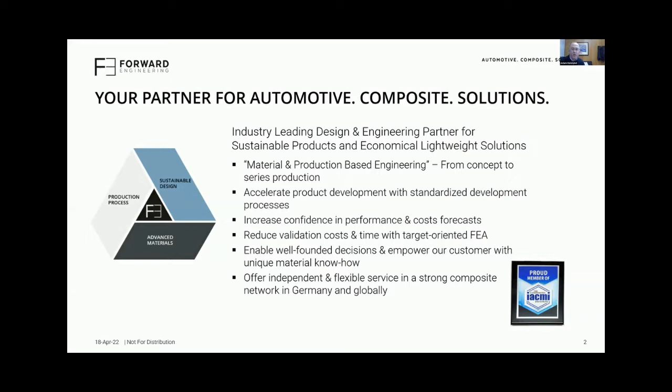Real quick, Forward Engineering, for those that don't know who we are, I'm Adam Halsband, Managing Director of Forward Engineering North America, based here in Royal Oak, Michigan. My colleagues are based at the headquarters in Munich, Germany, and in Nagoya, Japan, at Forward Engineering Japan. We are an engineering services company. We help to accelerate the development of composite-intensive mixed material solutions, leveraging our material and production-based engineering technology. So anybody interested in learning more about how we're doing these things, please let me know. But without further ado, let's jump into the topic at hand.

So battery enclosures. Battery enclosures are the most complex subsystem within the vehicle today. Now, we could argue that point, but from our experience and the projects and programs we're fortunate to be working on, the battery enclosures as we move into an electrified age are one of, if not the most complex subsystems within the battery electric vehicle. From structural crash, crush, EMC, moisture, liquid intrusion, thermal management, there's a very broad range of requirements, and not the least of which is thermal runaway.

When we think about requirements for these high voltage battery enclosures, it really is a mix of regulatory requirements and OEM technical requirements. So at Forward Engineering, we spend an enormous amount of time on understanding how to translate those global regulatory requirements and the variety or mix of OE requirements into relevant requirements at a subsystem material level. So we're working with folks up and down the value chain to understand how to translate those requirements to material level requirements, system level requirements.

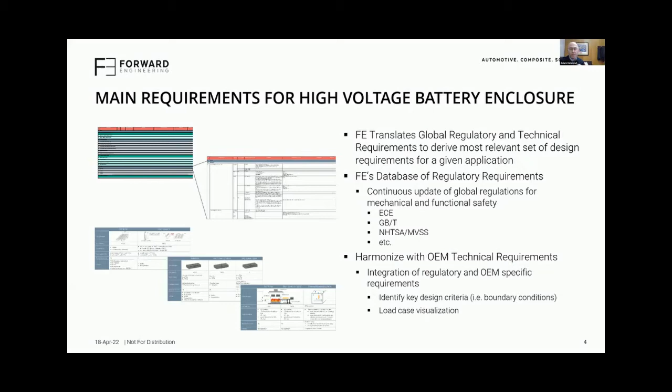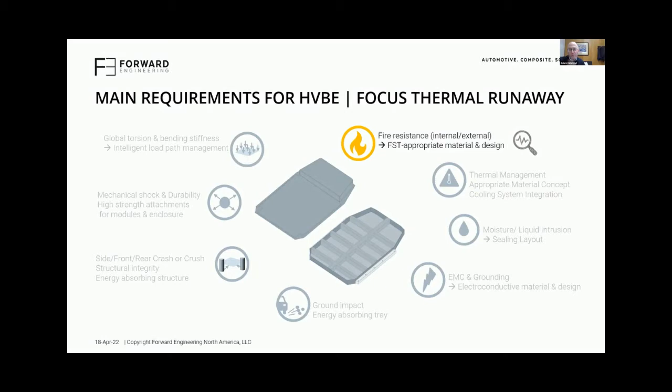For today's Innovations Insights, we're going to focus on thermal runaway of the multitude of different functional requirements and mechanical requirements. And we're fortunate to work with a number of different IACMI members. And I should have shouted out earlier, we're very proud to be an IACMI member, but working with a number of different IACMI members and others on advancing different solution sets for the multitude of functional requirements. But today we're going to focus on thermal runaway.

Historically, and by historically, I mean prior to 2019, 2020, when you would talk to folks about the most stringent regulatory technical requirement driving battery enclosure development material selection, they would point to the bonfire test. So GBT, China standards, European standards, the ECE R100 shown there, have a requirement for external fire on the battery enclosure and the enclosure being able to withstand that event that's defined within those standards.

Throughout 2019, China was developing new standards in response to what they were seeing in the field. Others were watching and observing what's going on with respect to the development of those standards, and that brought on the release of the GB 38031 in 2020 with a new set of requirements, which was safe vehicle egress. So basically, an alarm must be alerted and provide the occupants of the vehicles a minimum of 5 minutes time to exit the vehicle without affecting the occupants.

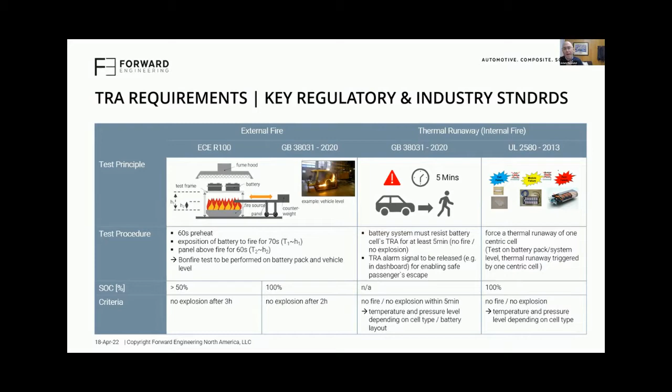With respect to understanding how those regulatory requirements translate to subsystem requirements and material level requirements, what were the standards, what were the requirements? And we were being asked by our clients and partners, how do we translate those system level, pack level, vehicle level requirements down to a material level requirement. And we were fortunate to be working with a particular OEM, and I'll share with you in a moment, who was pushing to understand this.

And we worked with different material suppliers and subsystems suppliers around the globe to understand what tests are out there. And many of you may be familiar with flame testing, the traditional UL94 type testing, and that evolved into torch testing. So amping up the Q factor, the flow factor, how much energy you are putting into these samples, and measuring backside temperature, frontside temperature, and does the sample withstand that?

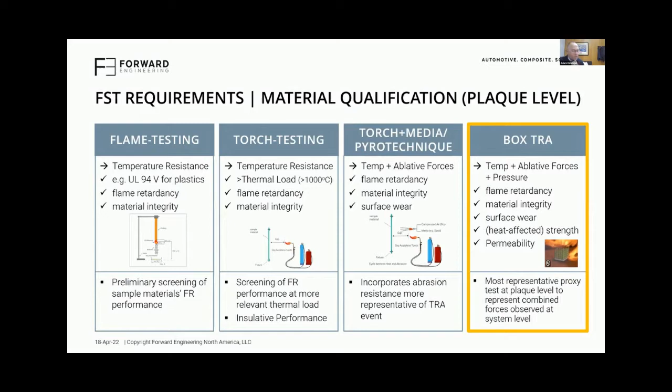The reality is a thermal runaway in a battery enclosure is much more complex than just temperature. And folks had recognized that, and developed a torch and media or a pyrotechnic test. And there's different ways that you can include abrasive media or ablative forces on the samples when you're testing to screen materials for applicability in battery enclosures. The reality is it's not just temperature and ablative forces, it's temperature, pressure, and ablative forces that these materials must endure in order to have a realistic screening of materials for applicability at a vehicle level or at a pack level.

So as I alluded to a moment ago, we were fortunate working with the materials engineering team at Hyundai Kia. They were asking the question, what are representative testing standards? How do we develop or identify the most representative screening methodology at a sample plaque level to represent system level performance? Out of that was born the box thermal runaway test, which has been captured by the Underwriters Laboratory folks. We collaborated with the Underwriters Laboratory folks to capture that test as UL 2596.

So what that test is, and I'm going through rather quickly, I apologize, with the limited time available, want to share as much as we can about this exciting development. That was actually published in January, the UL 2596, but essentially, what we're doing is we're utilizing a 5x5 array of lithium ion cells, 18650 cells, and we're initiating thermal runaway of those cells and imparting that energy on the sample. So when you look at the image on your screen and you see that brown panel, that is the sample under test, typically around 200 by 200 by an appropriate thickness. The nominal thickness is typically around 2 millimeters.

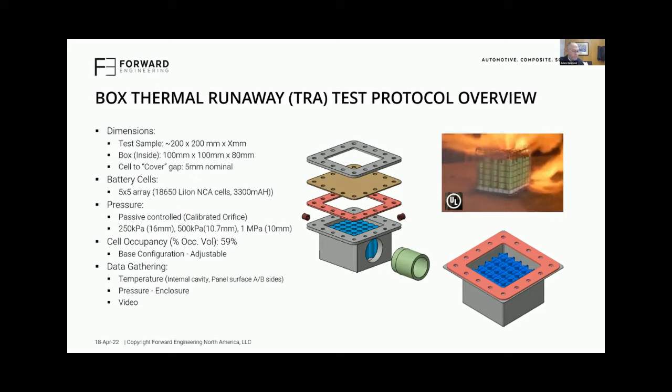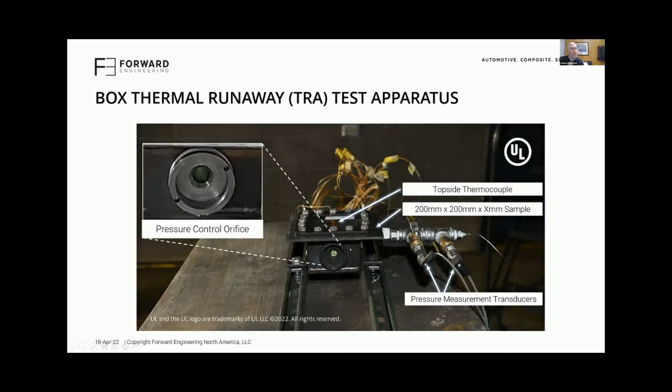In the image to the right there, you can see some wire, which is used to contain those cells or hold those cells as we're dropping them in, and you'll see that in another image. The items over to the right there are the, I think I can use my cursor. So here we have pressure transducers, thermocouple, and we're measuring pressure and temperature inside the enclosure, temperature on top of the sample, and that's some close up there.

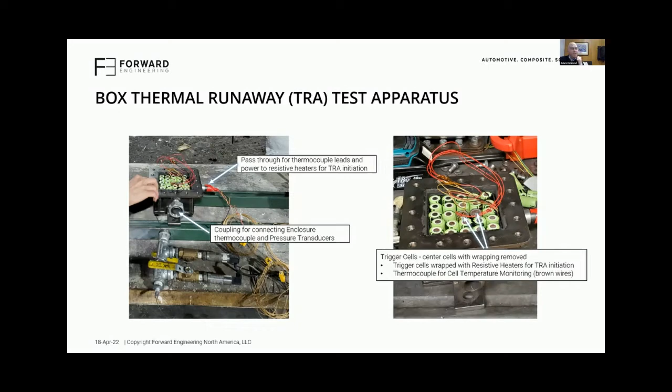And here's the fun stuff. This is not what you want to see. So in the event that the sample does not endure. Now, having said that, not what you want to see, the reality is we want materials to perform good enough. So sometimes when you're running the samples, you're going to push the limits of what those samples can do.

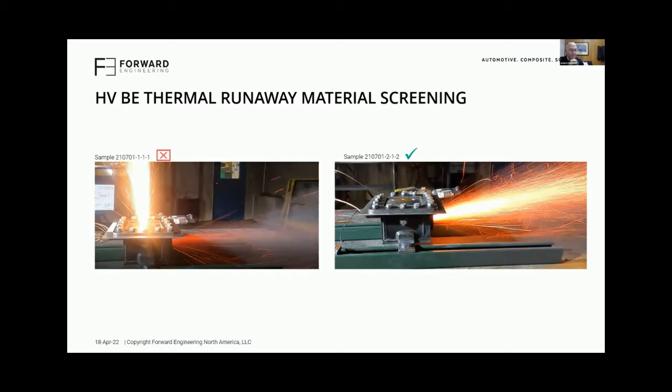And that's what you're seeing here is a sample material which did not withstand the pressure, the energy that was imparted on that sample. On the sample on the right, you can see a material that did withstand that energy imparted upon it. So I'll real quick jump over here and show you what it looks like real time.

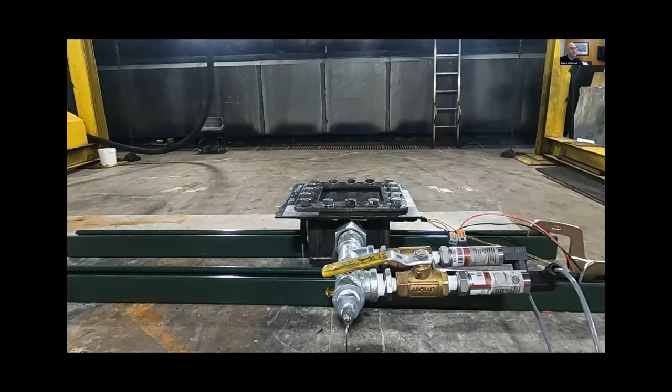That would be an example of a sample panel that yielded, that did not endure the event. Now, let me quickly show you an example of a sample that did endure that event.

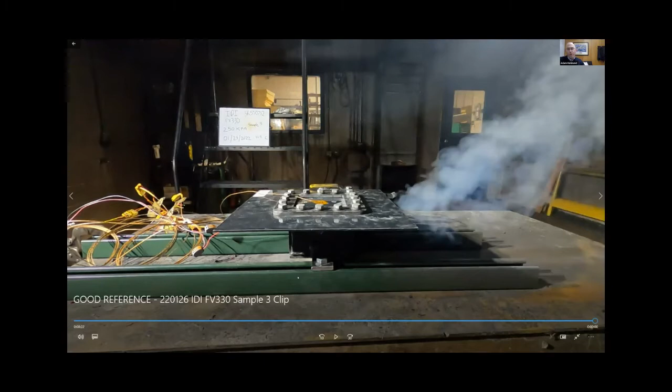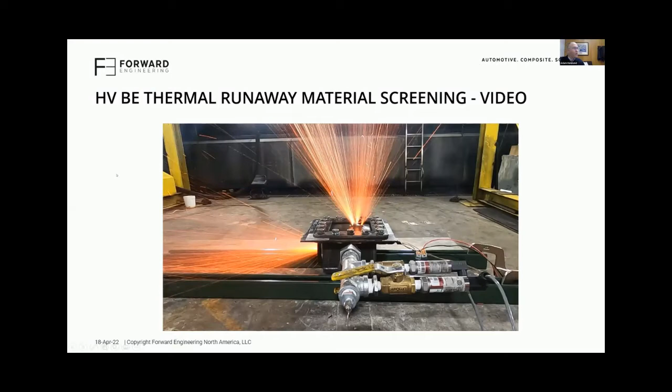And this is, of course, the fun stuff you want to see, where we have a composite sample that has endured the incredible forces imparted upon it by a thermal runaway event, and gives us good confidence that when we scale this up and when we apply this material at a scale level, that it will be able to endure that event.

Again, being sensitive to time, we can see these curves here, and this is the type of data that's generated from the reports. We have temperatures that the samples are being exposed to, 1,000, 1,200 degrees, that nominal pressure that's being imparted on that sample inside that enclosure, a low of nominally 200 kPa up to almost 400 kPa with the nominal 240 kPa. Topside temperature, this green line showing you the temperatures on top of the sample.

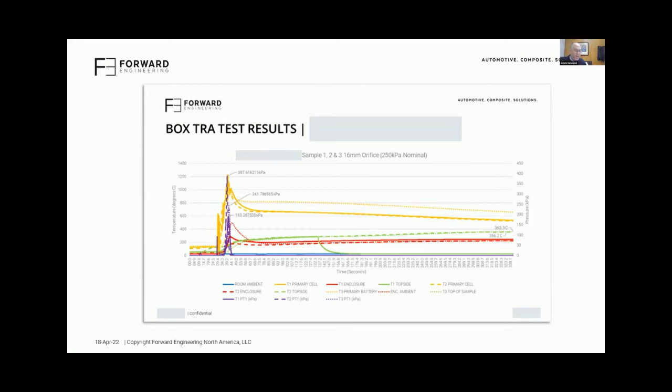And we love to go through in detail and review with the folks that run these tests, the results. It gives us great confidence in what the materials can do at a pack level. So I very quickly went through a really fun topic, and welcome any questions, Dale. I'm sure there will be, whether online or offline.

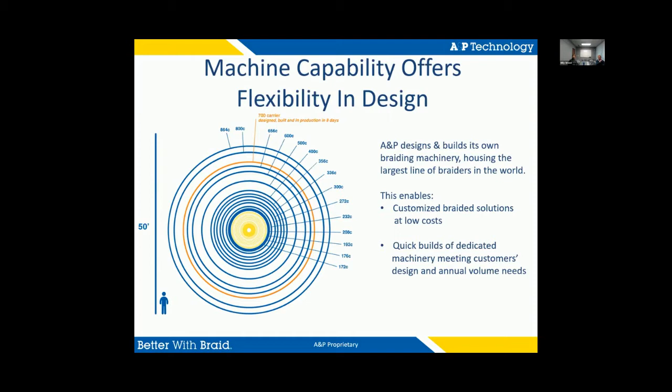Or you can make something using very fine yarns, so a thin cell wall. So think rocket nozzles and such. So having this ability not only to build the world's largest braiders, but lots of braid sizes in between really allows a lot of flexibility for folks like Brandon to work with the customer base or people interested in braided composites in general to really right size and drive cost out of applications.

Three primary product lines, as you can imagine. The first one, the most common one, would be sleevings. But then from there, we can slit the sleeving open, lay it flat to create a fabric, and impart some of those virtues that we talked about with the braid angle optimization into a broad good, which then can be pre-pregged or preformed. So utilizing or marrying the rotational speed of the braider with the take up to create something that's really just kind of a drop and shoot. Again, the focus on optimizing performance while reducing touch time and labor.

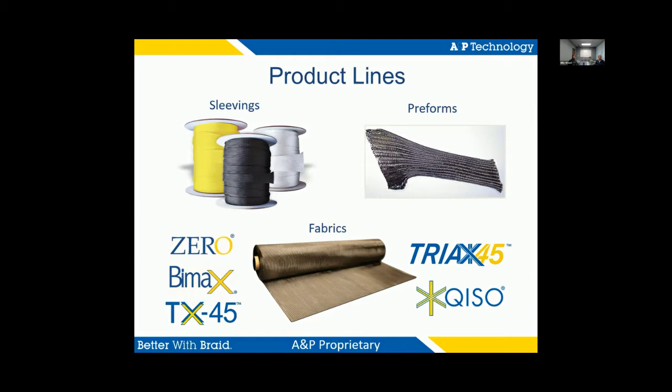Sleevings, where would these be used? Prosthetics, propellers. We're seeing, along with battery box enclosures, a high interest in these types of applications. Why? Because the sleeving's going to have fiber continuity from root to tip. That helps impact performance, fatigue life, etc. Ease of layup and repeatability, right? If we do our job right and we provide you a sleeving at the correct diameter with the correct number of ends, every time that you lay this up on your tool, it's going to give you the same exact layup, improving first part quality.

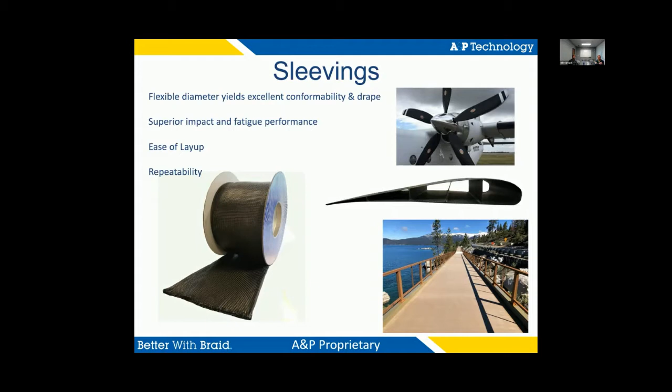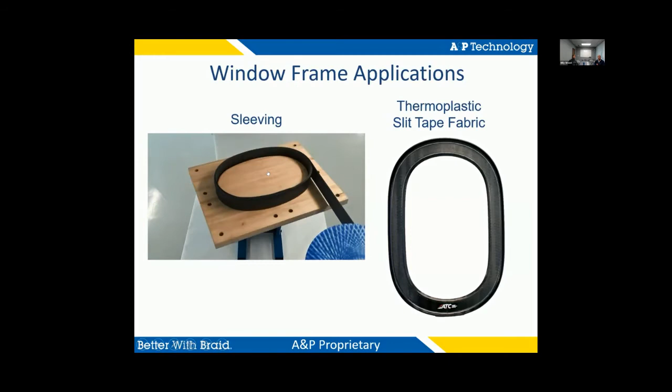So just kind of laying that down, in this case we introduced a drawstring yarn. We pull on that or activate that to create the downward flange, and then we can pad out the outer flange, introduce a couple noodles, and then a capture sort of surface ply, and voila, you have a window frame. And as I mentioned on the previous slide, all of these braid angle changes are repeatable. And as you can see here, the layup was simple and efficient, because we can predict the braid angle, something that can be managed, measured, and designed against.

It's worth noting, we're not going to touch on it a lot in this short presentation, but we've done a lot of work with thermoplastic recently, where we used our QISO architecture, which we'll touch on in a few slides. So a 0 ± 60 architecture using slit tape thermoplastic unidirectional prepreg conforms quite well into this similar type application.

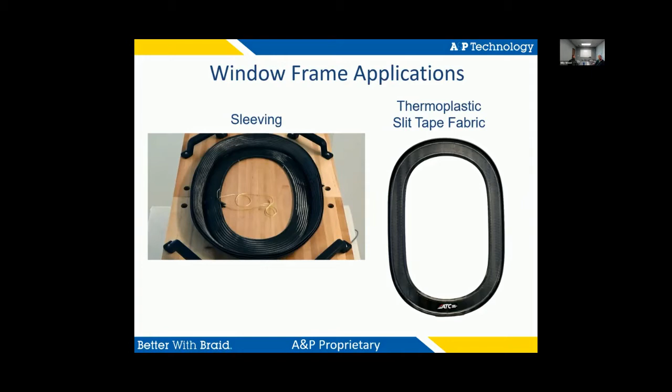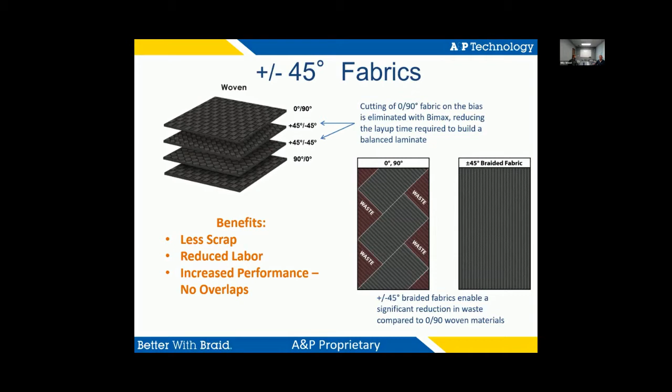I mentioned a few slides before that braid naturally forms at ± 45. We pass that efficiency onto the customer in the form of our Bimax or TX45 fabrics. So if you are cutting on the bias, in this case 0/90 on a ± 45, and then kitting and laying it up, I think you'd be better served using your 0/90 and then feathering in ± 45, or obviously if the design calls for 45 across the board, as in the case with a lot of high aspect ratio parts or something that's torsional design, just go straight to the source, and then off the roll you can have a ± 45 solution, saving upwards of 30% scrap and a significant amount of layup time and management.

I mentioned we have 2 different forms. Bimax, it's very straightforward. It can be pre-pregged readily because we do introduce a small amount of glass axial yarns. So it has a high level of conformability, but still able to be managed by hand without it distorting all over the place. If you do need a higher level of drapeability, we do have TX45, which comes on a poly backer.

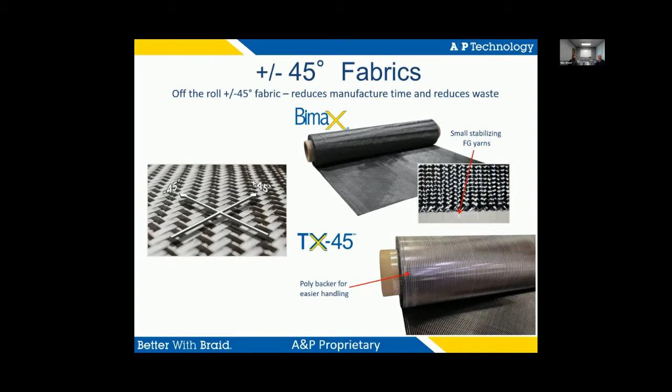Moving to a tri-axial design, our standard product offering would be QISO, which is 0 ± 60, with equal weights of, in this case, we're showing carbon, but we're fiber agnostic, so supplier and material type. So we braid metallics, organics, ceramics, quartz, glass, aramid, etc. But really here with QISO, the fiber yield in the 0 direction is going to be equal to that in the ± 60 by yield.

The cartoon here is actually courtesy of Boeing. They were using 4 plies of woven, half of which had to be cut and oriented at the ± 45. So already a candidate for Bimax, but really taking that next step in efficiency and going to QISO, they were able to cut a 4-ply stack that's balanced down to a single ply of QISO.

So the takeaway here is not that 1 ply of QISO is necessarily stronger than 4 plies of woven. It's the ability for the user to design to strength and minimum thickness. And that's essentially what we did here, is that whether it be a single ply, 3 plies, or 53 plies, you're no longer bound to multiples of 4 or 8, of which half have to be cut and oriented.

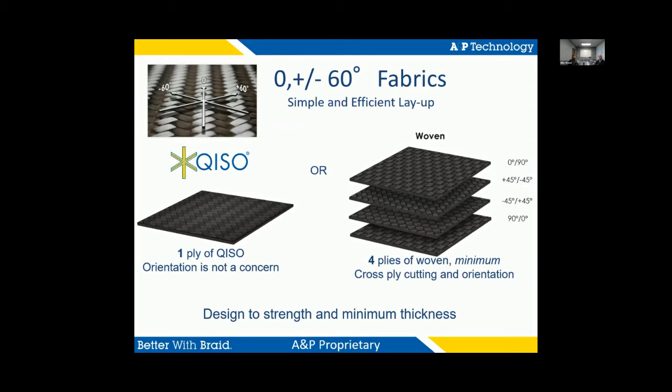How does QISO drape, right? So we've done a lot of automotive applications, working with Ford and a number of the OEMs out there, but QISO drapes very well compared to unidirectional, traditional 0/90 woven, and even some of the quad NCF materials out there. So drape with a high level of infusibility as well.

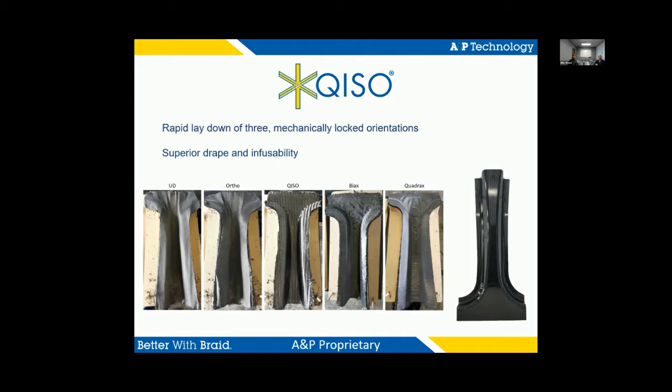This really demonstrates IACMI's ability to put together different industry folks, but QISO was involved in some of the testing that was done at Forward, and we've been working with IDI and a number of the entities out there to show QISO's viability in the battery box enclosure market. So the ability, working with folks like Brandon, to tailor to meet the strength and stiffness, as well as the flame resistivity requirements.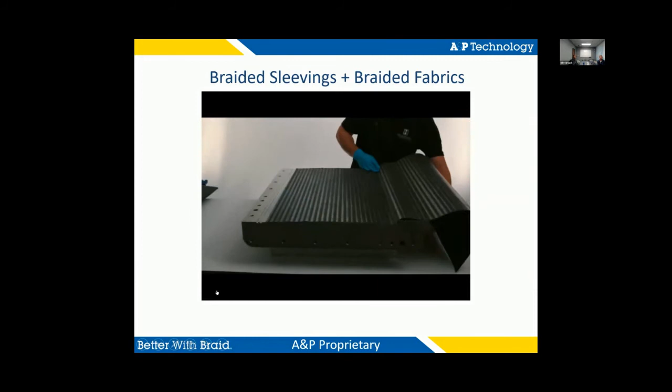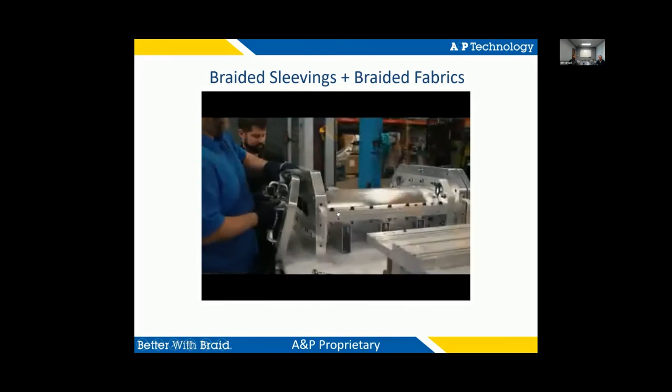There's another video showing how the sleevings can be laid up quite efficiently to create a torque box type structure, then overlay QISO for a control surface. So this is courtesy of our friends up the road at Hawthorne Composites here in Ohio. They also take advantage of a noodle. So they're incorporating sleevings, fabrics, and noodles, really three of the product forms that we highlight here at A&P: sleevings, fabrics, and preforms.

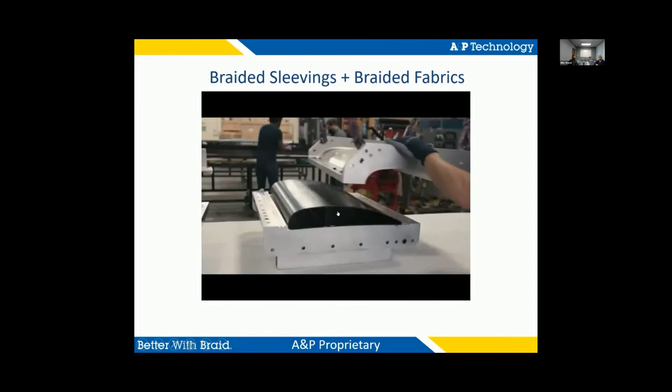Some applications using braid: golf clubs. All of the Callaway golf clubs use a form of QISO. Prosthetics, baseball bats, a lot of board sports. Control surfaces, as we mentioned, this is flying on Boeing aircraft, tactical UAVs. And one thing that we didn't touch on, trying to focus on high rate industry, but another way that we can be high rate but also drive cost out would be with preforming.

As noted here with the tactical UAV, we do aircraft interiors and thermoplastics, stiffening elements, braided propellers, infrastructure, tooling, and satellite or communication dishes, pipeline repair.

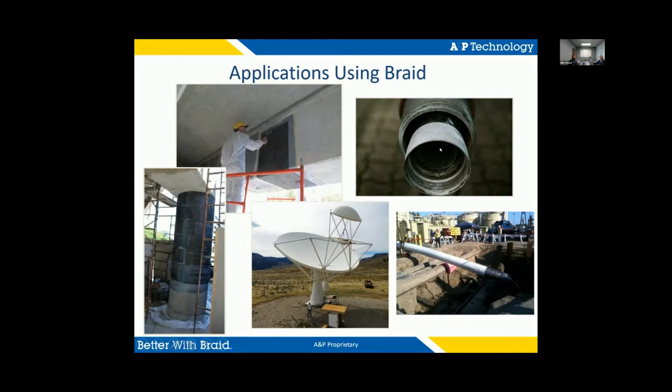Yeah, braiding's a really amazing process. I remember first being acquainted with it back in my old Fiberite days. We had a textile technology and did some braiding on a 256 carrier braider, I believe, and did a lot of cool things with that. And of course, I think you guys really burst on the scene in aerospace big time when you developed the containment case. Braiding the Kevlar containment cases for jet engines to protect against blade throw out, and it's good to see you continuing to do a lot more in aerospace.

You guys still supply, I presume, the braid for the frames for the 787. Yep, the 787 actually, correct. Infused frames. Yeah. I think a lot of people underestimate the power of a 0 ± 60 laminate. We all think quasi-isotropic as being strictly a 0/90 ± 45, but the 0 ± 60 is a really clever way of achieving a balanced laminate with fewer plies, and it's good to see. I think braiding is obviously a perfect way to create that.

Will it let you just take the slideshow from there? Yeah, I'm just struggling to get the... I think one more escape and you'll be there. Yeah. Hit the display settings and flip-flop it. You're in presentation mode. Yeah. I was able to see that earlier. Now I'm not able to. Okay. Worked perfectly during practice, of course. I know it did. I know it did. So yeah, there you go. It's not. What's that? Well, now we see you. I know. I stopped sharing for the moment. So, but what was happening is I'm not seeing.

If you hit display settings, will it work? Yeah, that's what I'm trying to get to, but I can't get to it due to the taskbar being in the way. Oh, because I can see it. Yeah, I know you can see it. And it worked fine just a while ago. So. If you'd like, you can send it to me and I can try to run it. Okay, let's try this again. Why don't I get it started first and then I'll share it. There's a hint here that you can drag the Zoom taskbar to the side. Should have it now. Okay. Yes. All right. I don't know what happened. Always works in practice, doesn't it? You know, and I've been doing this a long time. Yes, it does. All right, you're off. All right, good. All right.

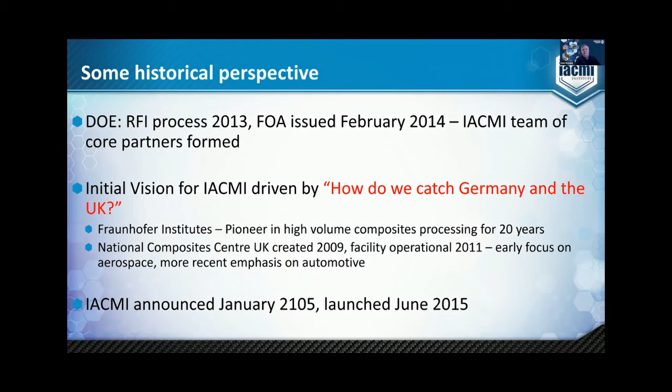We were awarded in January of 2015, so not 2105, but we did launch in the middle of that year. The goal initially was around 2020 and 2025 targets: reducing the cost of composites by 25%, particularly carbon fiber composites, reducing the embodied energy in carbon fiber composites by 50%, and increasing the recyclability of all composites to where 80% of composites could be recycled or demonstrate recyclability at the 80% level, with further targets to 2025. We had to create membership models, capabilities, operation models, and then start managing a portfolio of projects.

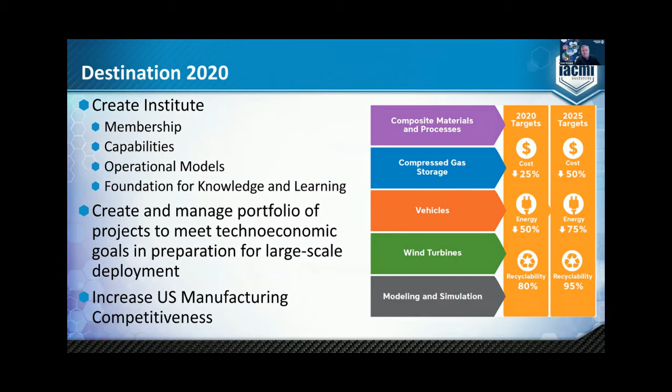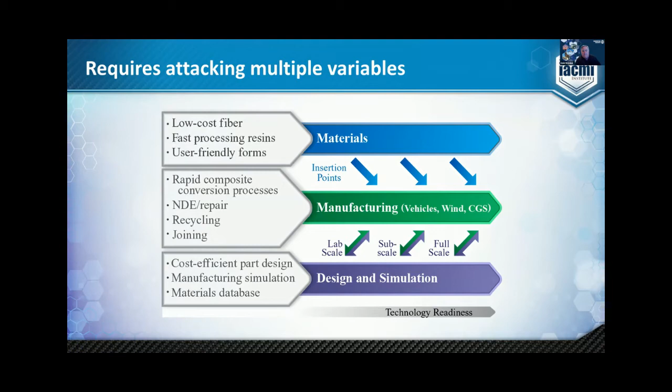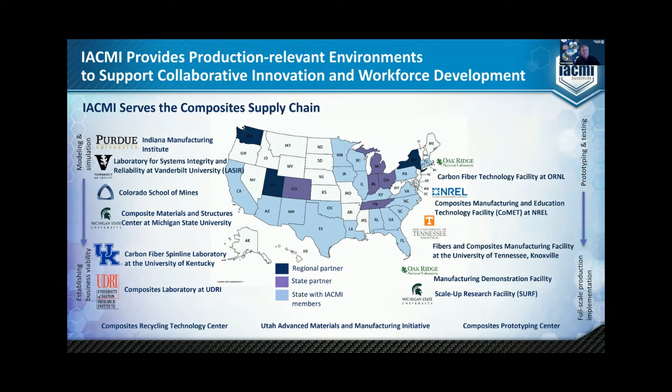So in order to get there, we had to create some capabilities, but we had a good starting point. We had facilities in place at many of our research sites, over 300,000 square feet to start with, over $200 million in replacement value investment, and then went from there. And so 5 years later, we have new world-class capabilities for composite manufacturing in multiple states. And I'll walk through a few of those real quickly.

In Tennessee, where we're headquartered, new fibers and composites manufacturing facility. The carbon fiber technology facility already existed, but there's also a new pultrusion line in that facility and some other capabilities. The Joint Institute for Advanced Materials was built in this time frame. And then the third building at the manufacturing demonstration facility, which is pretty impressive, also came about in this time frame. Now, we can't claim credit for creating all of these, but certainly the assets that became available to us to do the work we needed to do became available from there.

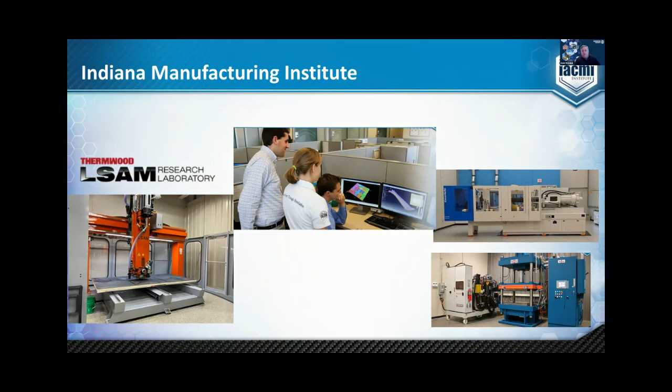A week after our first members meeting in 2015, we had a groundbreaking in Indiana. It was literally a cornfield that had been mowed down. And just over a year later, was the Indiana Manufacturing Institute, which does have injection and compression capabilities. Recently, a large-scale additive manufacturing research laboratory. And then its main focus is around modeling and simulation. So those pieces of equipment are used to validate a lot of the modeling and simulation work. And I'll talk about that a little bit later.

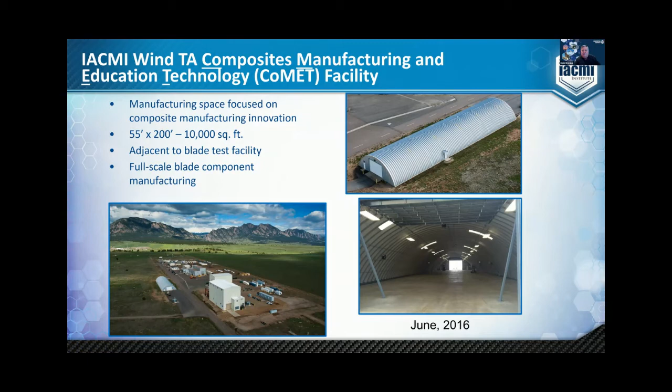In Colorado, we had an empty shed out there that in June of 2016, by roughly 6-7 months later, had a fair amount of equipment in it, in which we were able to build a 9-meter blade, and has since done many other things.

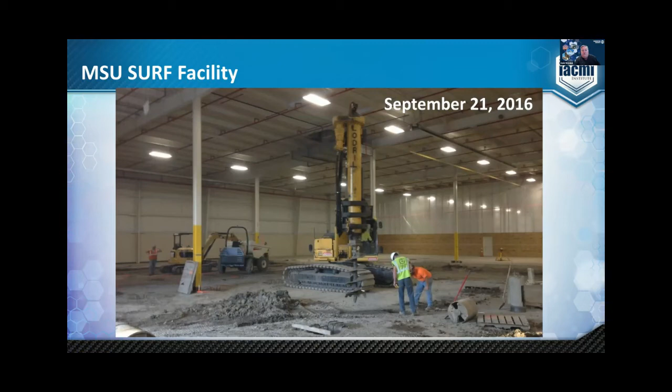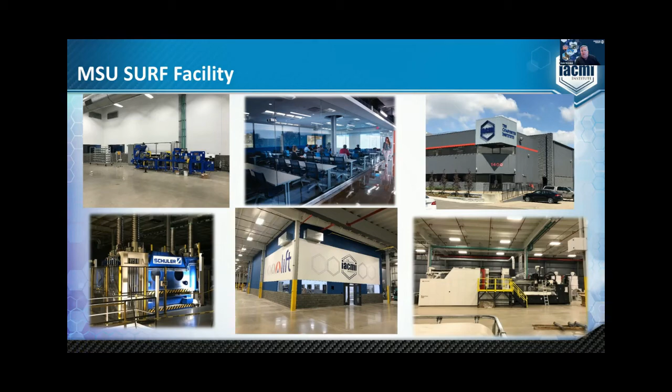In Detroit, in April of 2014, our partners at the Lightweight Metals Institute took over this building in downtown Detroit and Corktown. Many of you may have been there. Full of graffiti, leaking roofs, and so forth. Got it to a stage where we could take over half the building and do some things as well. So you can see here in September 2016, we're digging holes in the floor to put pilings in, and then spent a fair bit of time digging a pit for a very large press, the 4,000-ton press that's there. So today you walk into that, you wouldn't even have known the kind of shape it was in. We've got clean rooms, the big presses, classrooms, pre-preg line, many things there to be able to carry out the work that we want to do.

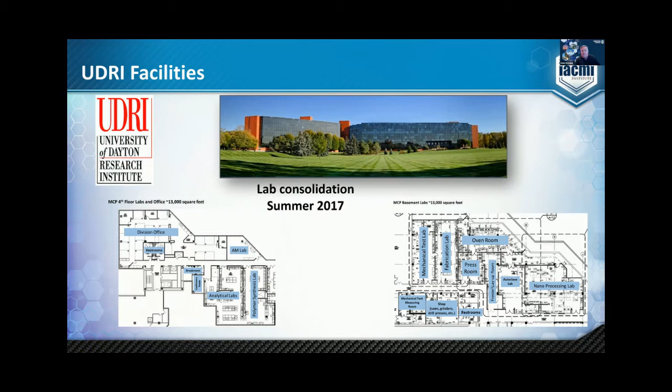Our partners at the University of Dayton Research Institute had equipment kind of strewn all over Dayton campus buildings, did consolidate their labs in the summer of 2017 into what was formerly the NCR headquarters. And then in 2020, opened the Dayton Composite Center with the globe equipment there and some other pieces of equipment to focus a lot on emerging markets like urban air mobility.

So with all this capability, we've got to make stuff. And I'll talk about a few projects. One of the big highlights was the carbon fiber liftgate inner panel with Ford for the Mondeo/Fusion. Dow and DowAksa had developed a special carbon fiber molding compound that had properties similar to cast aluminum, and that was due to its unique architecture in the platelets.

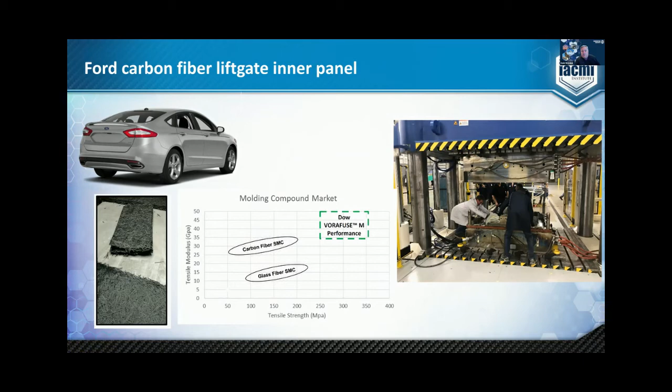You can see the 4,000-ton press there being used for molding this part. The charge pattern being laid up on the left. Cure cycle of under 3 minutes, which gets you to 100,000 pieces per year. You see some of those inner panels. It was bonded to an aluminum outer panel and tested. The material has Ford specification and is available to any Ford engineer who wishes to specify it on a vehicle for a particular application.

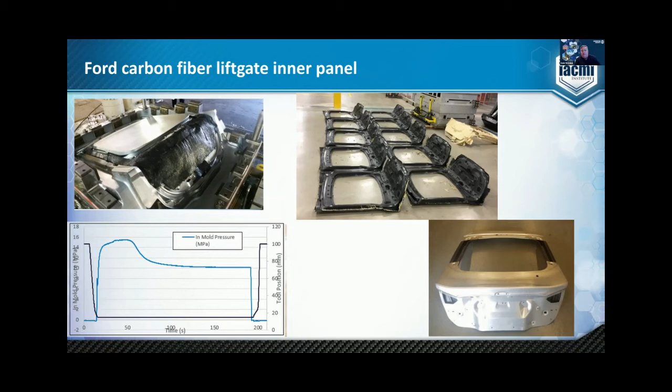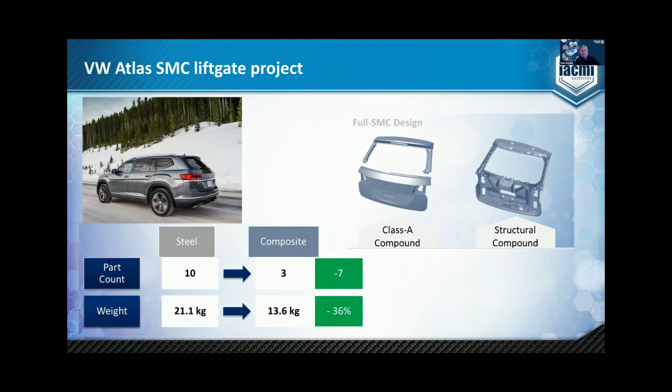Similarly, Volkswagen approached us to develop a lightweight liftgate to replace a steel liftgate on the Atlas. This went from 10 steel parts to 3 parts in composite, although you still mold those in only 2 tools, so you have kind of a family mold for the left side there on the outer. Weight reduction of 36%. Initially, this project thought it might need to incorporate some carbon, but it turns out we could do this all with glass materials for the low density outer and a high glass inner.

Again, big steel tool molding the panel in the press. You can see a number of outer panels, a very complex inner panel. Geometry was very important there in terms of achieving that stiffness. And this is useful as Volkswagen continues its electrification. Composites don't have to be a premium product. In this case, their recurring cost study showed that the SMC liftgate was 10% less, or 9% less costly than steel and 37% less costly than aluminum.

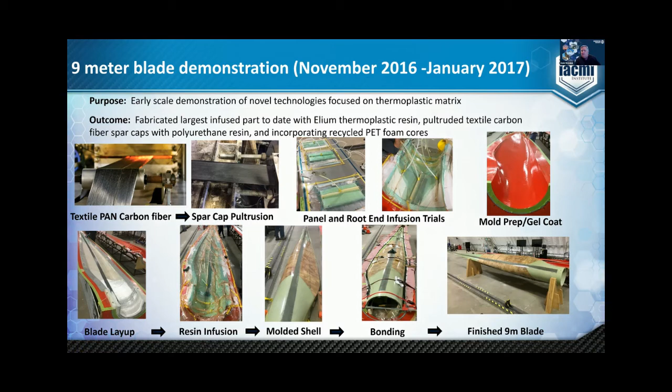In the wind area, we did some novel work with taking textile PAN carbon fiber, pultruding that for a spar cap, and built a 9-meter blade. A lot of small samples, a lot of work in infusion trials, and then making this 9-meter blade out of Elium. Elium is a recyclable thermoplastic. This also had a recycled PET foam core.

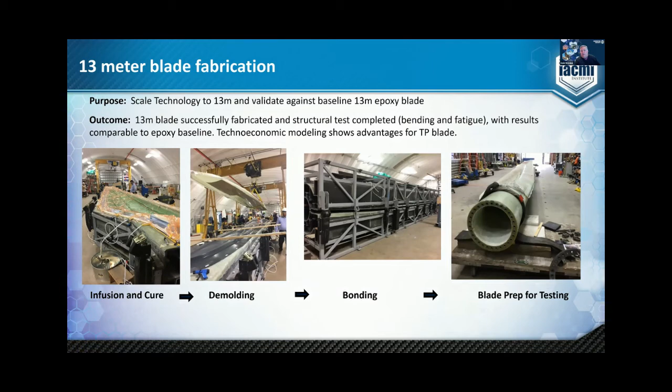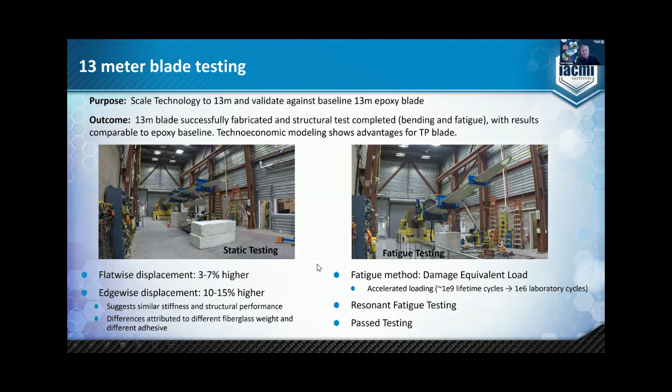This led to the development of a 13-meter blade that was built on additively manufactured tooling and then bonded together and prepped for testing. Then the testing was done compared directly to an epoxy equivalent of this same size. So it showed to be fairly even to that, and a suitable replacement for epoxy after 1 million cycles.

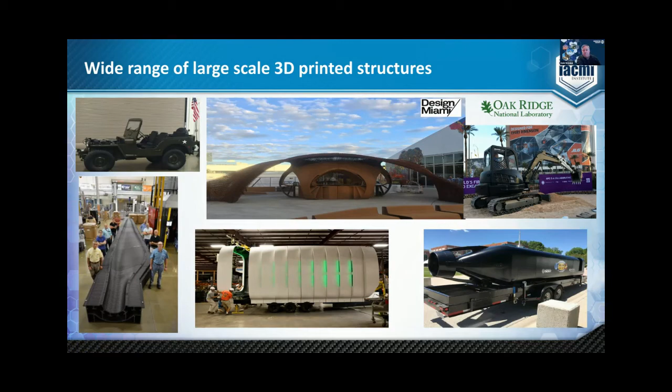3D printing. Friends at Oak Ridge had been doing a lot of work in this area. You can see that 3D printed wind blade tool on the left. Lots of other components using carbon fiber reinforced thermoplastics and developing a whole range of materials, including bio-based materials. You see the one on the top, which is bamboo reinforced polylactic acid. But some of that early work inspired a lot of other people, like Local Motors, for whom we did several projects leading up to the 3D printed Olli.

And then for development of new materials for what you see on the right, which is the Al Davis Memorial Torch at Allegiant Stadium, which is currently the world's largest 3D printed structure. So if you've seen that torch on television during the NFL games, it's all 3D printed structure with stainless cladding on the outside.

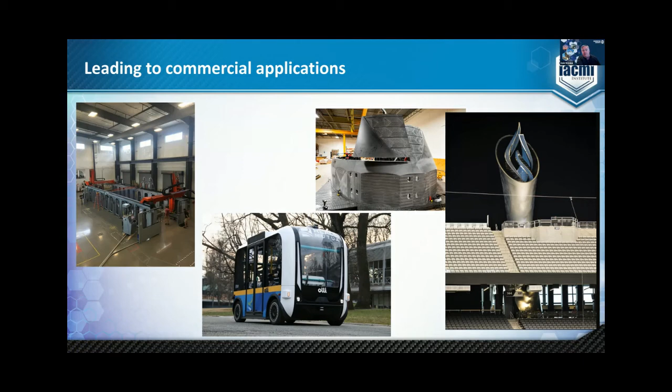And then finally in this area, couldn't leave without talking about infrastructure. We worked closely with several of our partners at Composites Applications Group and Structural Composites to replace a rural bridge in East Tennessee using a foam-filled composite bridge deck, a sandwich structure that had a road surface on it and came in and dropped in.

And one of the unique things about this is that it has a school bus driving over every day, big heavy trucks, and it's fully instrumented with sensors so that every time something goes over, that signal goes back to the University of Tennessee, where they're able to monitor it, and the pictures taken. So some very large vehicles have driven over that bridge. We see this as a great solution going forward for rural bridges in America.

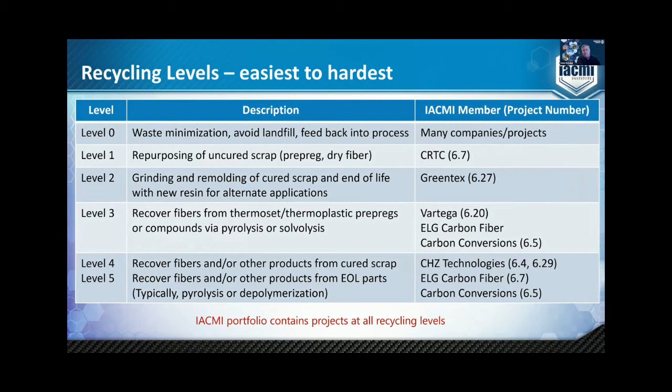I'm talking about remaking stuff. I'm talking about recycling. You can reduce your waste, but what do you do with the waste that you do have? And there's various levels here, and we've had projects in all of these levels, all the way from repurposing all the way up to recovering fibers from end-of-life parts. So 7 years of innovation in this area, going back to the Composites Recycling Technology Center, working with ACMA, working with a whole host of partners that you see down here.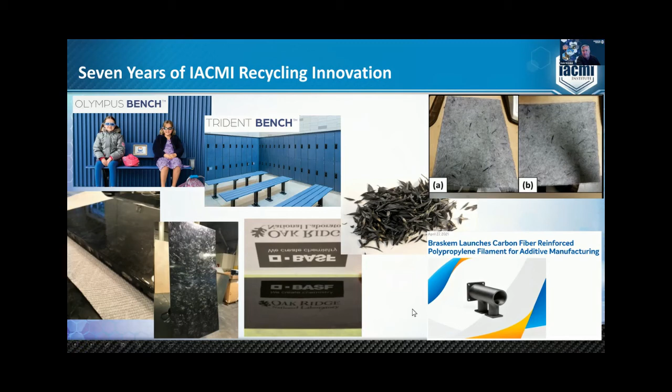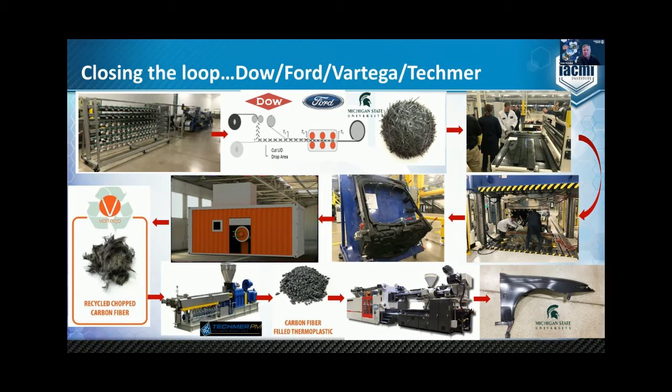We worked with Vartega. Remember the Ford liftgate, any of that scrap material was sent to Vartega for recovering the fiber. It was put into thermoplastic pellets, sent back to Detroit, injection molded into fenders, so it made the complete loop.

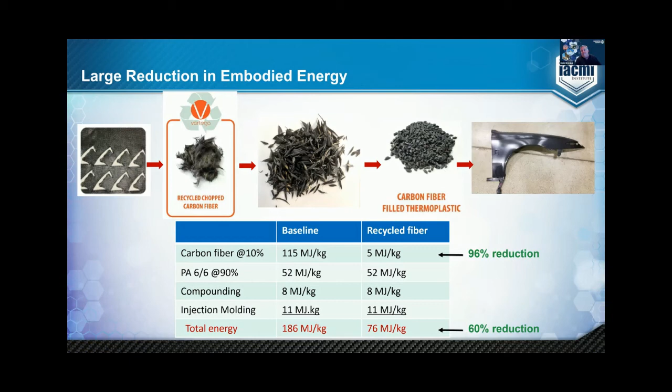One of the key things here is when you do use recycled fiber, you can see pretty significant reduction in the amount of embodied energy that's in the fiber, and then consequently the reduction in energy for the finished part, in this case, the injection molded part. So a big demonstration there on how to get embodied energy back out and reutilize a very important resource like carbon fiber.

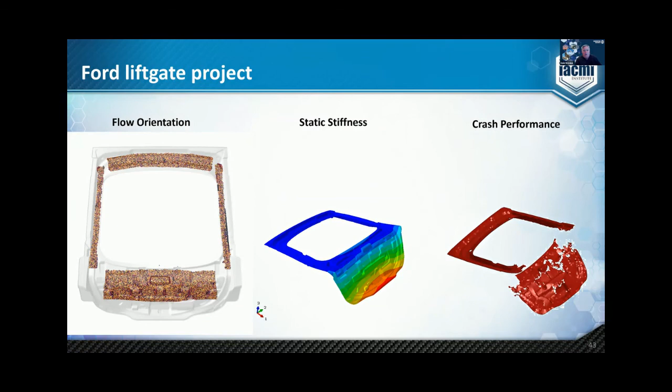All this has included a bunch of cool science. It included, for example, on the liftgate project, flow studies, non-contact measurement of fiber density, certainly crash performance correlation, digital image correlation for that fiber orientation after the molding. You see here the modeling simulation of that platelet prepreg SMC being molded. That informs the static stiffness and, of course, the crash performance of the part.

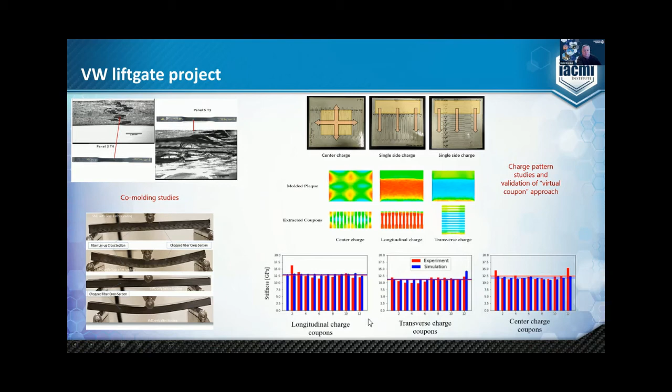On the liftgate project, we initially thought there might need to be some continuous fibers in there, did a lot of work in co-molding studies, but also did virtual coupon approaches to molding SMC, which was surprisingly consistent and very informative. Also the liftgate project had to start with a steel design, went all the way through that, and we wound up with a very lightweight, all composite design that met all the requirements.

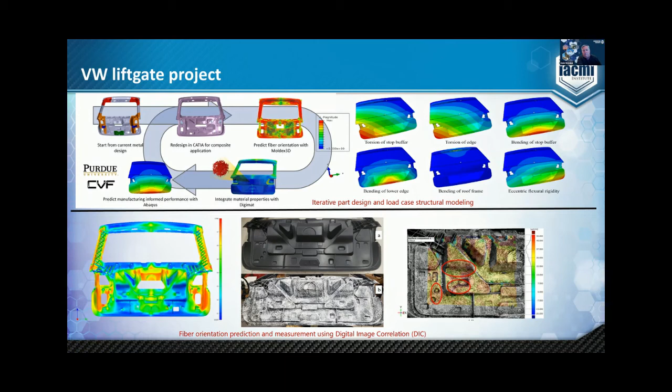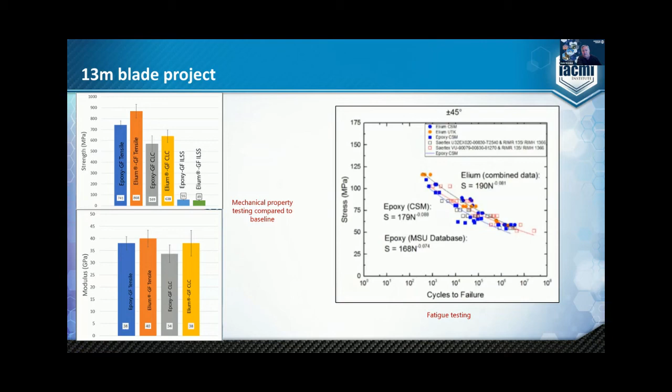And again, digital image correlation was used to validate fiber orientation in that part. On the blade project, early material characterization showed that Elium glass fiber could compete with epoxy glass fiber, both in static testing as well as fatigue testing. We also did some interesting things there.

I talked about the 3D printing of the skin molds, using simulation software for blade infusion, and then a novel technique devised by Vanderbilt University to measure surface temperature and correlate that to degree of cure in the part. So when you can see through the bag, you can measure the surface temperature and then correlate that to degree of cure, so you know when you're done.

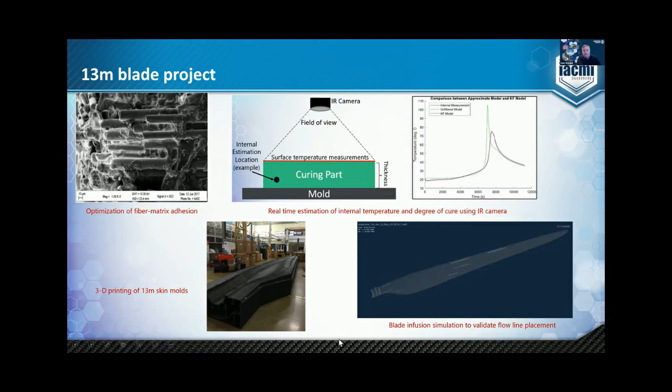3D printing, there were a lot of coupons being made. These are basically 1 foot by 3 foot coupons, very deep, and a fixture was made to test those. So this really helped inform Local Motors and others about how to design with 3D printed structures with various infill patterns, which was used to help design the Olli.

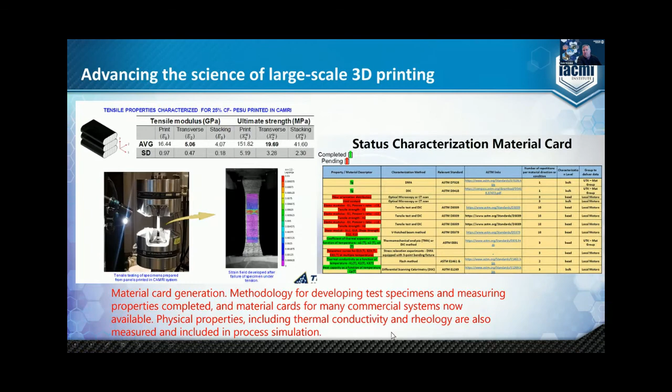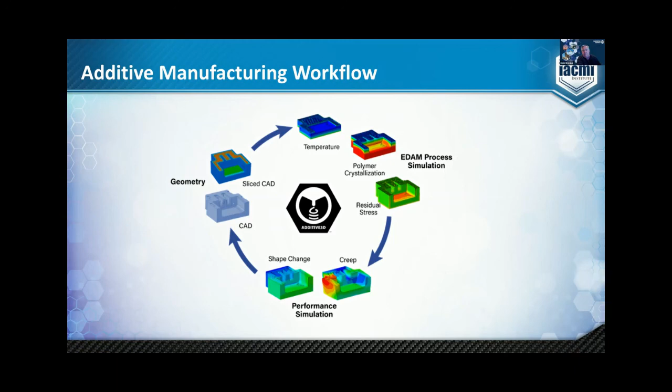Purdue did a lot of work in developing material cards for 3D printed systems that go into an additive manufacturing workflow. So you can do the process simulation, both from a machine standpoint and material standpoint, and then understand residual stress, the creep, and other performance requirements, similar to any other composite material. Big advance there.

And then finally, in this section, non-destructive evaluation is a project done at Michigan State University and sponsored by the American Chemistry Council. It's how can you measure parts in a factory, carbon fiber parts in an automotive factory, at one a minute? And this was done using air-coupled ultrasonic technology combined with eddy current technology, very novel. They had to actually make their own circuit boards for the transducers to do this.

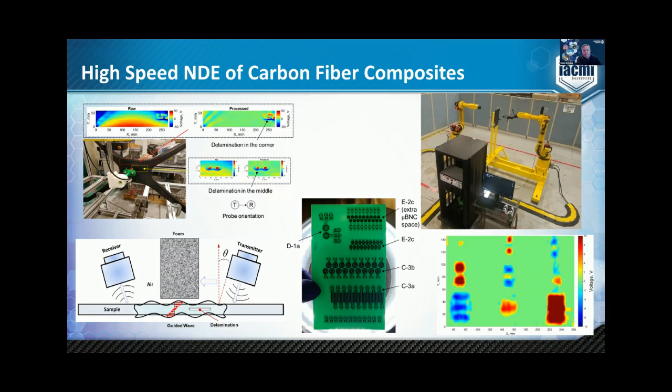And finally, I'll wrap things up with some outcomes. You know, we've obviously been through a pandemic. We continued through that with over 50 projects involving 90 members and over $150 million of R&D value. Over 150 members have been active in IACMI. And of our industrial members, over 2/3 of those are small and medium enterprises. So that's a very important role to connect folks together.